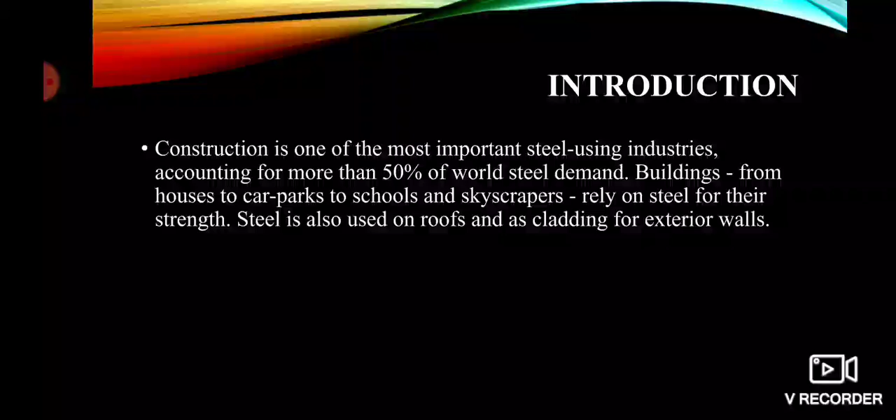So what is steel? Steel is an alloy of iron and carbon, and sometimes other elements such as chromium. Because of its high tensile strength and low cost, this material is best used in buildings, infrastructures, tools, ships, trains, cars, etc. Iron is the base metal of steel and can take on two crystalline forms.

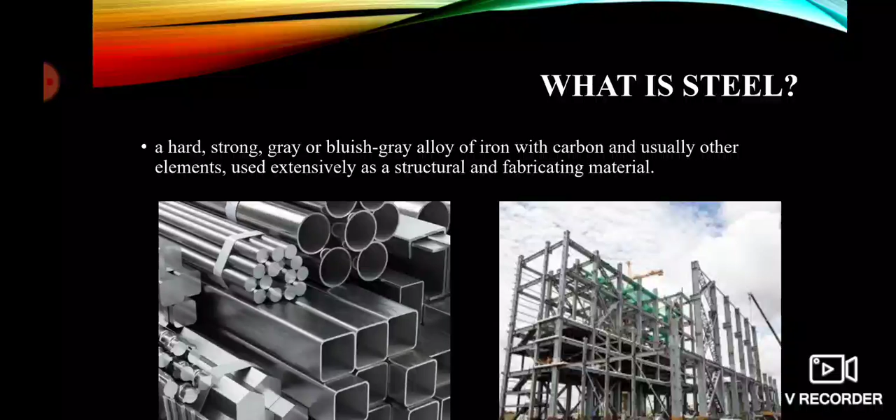Three common types of steel are used in construction. Firstly, plain carbon steel, or mild steel, which is one of the most used steels in construction. This is the most common type of steel used in building construction. It is incredibly strong and durable and ensures a sturdy build due to the strength carbon steel provides. It is hugely useful in building and has proven to be of great advantage.

Also, this type of steel does not crack when bent. It is immensely flexible and ductile, with great plasticity, along with the fact that it can endure calamities like earthquakes without causing cracks in the steel. This is the most advantageous factor of carbon steel.

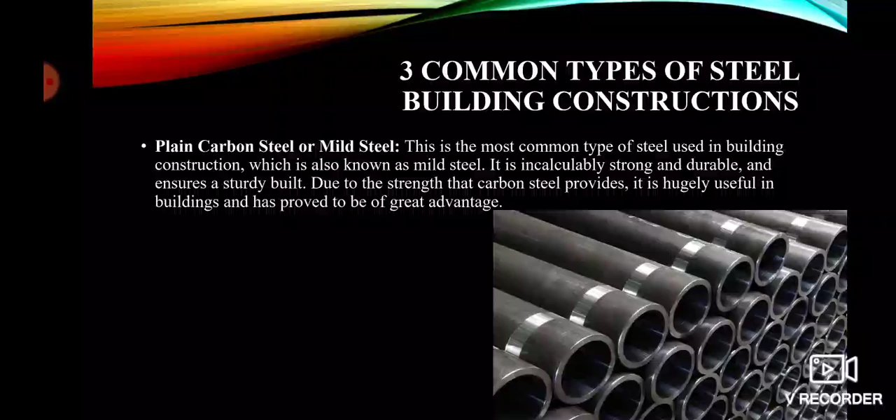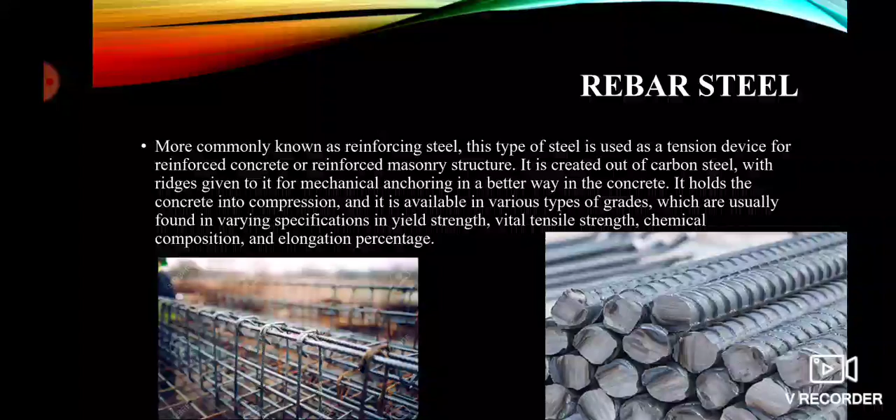Secondly, rebar steel, more commonly known as reinforcing steel. This type of steel is used as a tension device for reinforcing concrete or reinforcing masonry structures. It is created out of carbon steel with ridges given to it for better mechanical anchoring in the concrete. It also provides resistance, durability, and aesthetics, with local resistance and stiffness that spreads through a wide area, which other types of steel aren't usually equipped for. It has immense expansion potential and comes in various sizes depending on the country and construction.

Thirdly, structural steel. Structural steel shapes are made of this kind of steel, formed out of a precise cross-section, following definite standards for mechanical properties and chemical composition. Structural steels come in various shapes like I-beam, Z-shape, HSS shape, L-shape angle, structural channel, C-beam, cross-section, T-shape, rail profile, bar, rod, plate, open joist, or web steel, etc. Standard structural steel also varies in different countries with different specifications.

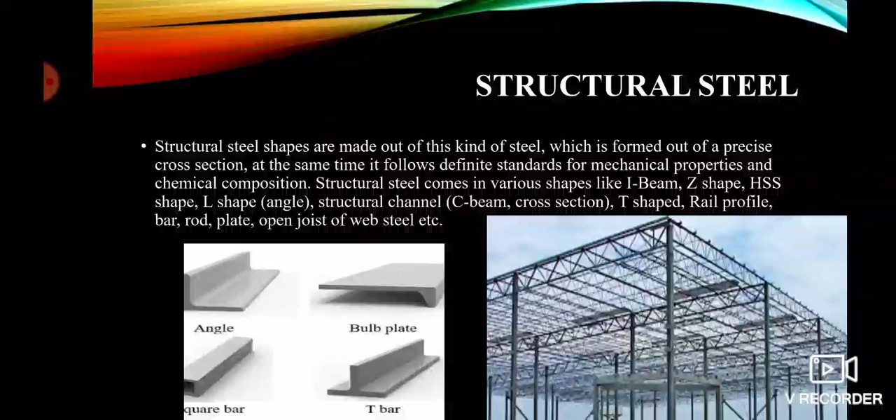For example, the European I-beam is a structural steel that comes in carbon, low alloy, corrosion-resistant, high-strength low alloy varieties. Structural steel is ductile, strong, durable, and can be morphed into almost any shape based on the construction. Here you can see a picture of what structural steel is, showing the different shapes this type of steel comes in: the angle, bulb plate, square bar, and T-bar. So why is steel used in structural buildings?

Now we'll be talking about 6 steel infrastructure benefits: speedy construction, service integration, value for money, flexibility and adaptability, sustainability, and quality and safety.

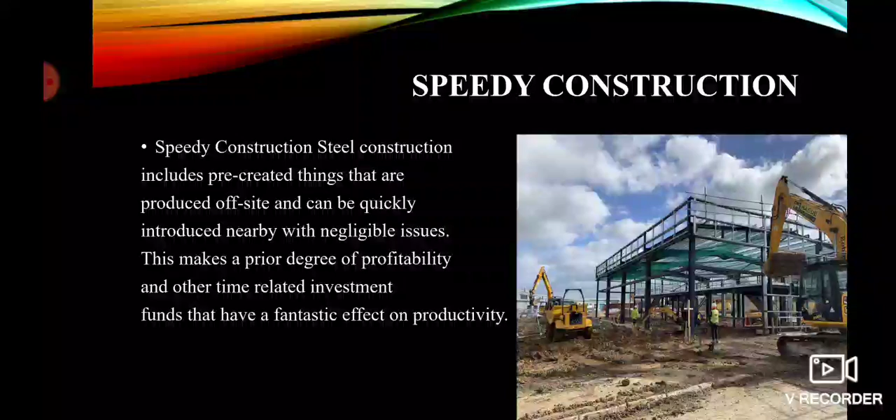Speedy construction. Steel construction includes pre-created components that are produced off-site and can be quickly installed with negligible issues. This makes a prior degree of profitability and other time-related investments that have a fantastic effect on productivity. One of the key benefits of using a steel structure is the ability to create more space. Steel construction involves prefabricated items that are manufactured off-site and can be installed with minimum problems.

Secondly, service integration. Service integration is one of the key advantages of utilizing a steel structure, with the capacity to create more space. Mechanical ventilation for building structures, such as commercial buildings, can be effectively incorporated without taking from the original design and depth of floors. This can be especially helpful when building height restrictions are concerned.

Flexibility and adaptability: steel pillars with web openings take into consideration open arrangement outline with insignificant columns and effective dissemination space.

One of the key benefits of using structural steel is the ability to create more space. Mechanical ventilation for commercial buildings, and structural steel beams with web openings allow for an open plan design with minimal columns and efficient circulation space.

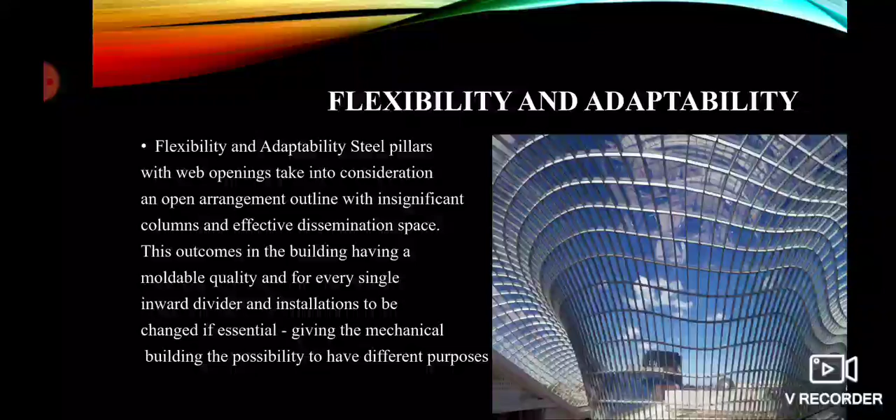Sustainability: all steel structures are 100% recyclable, and because of the building's versatility and adaptability, the structural life can be definitely protracted, in contrast with solid aggregations where their use can be restricted.

Also, all these structures adhere to high environmental standards and achieve low operational carbon targets.

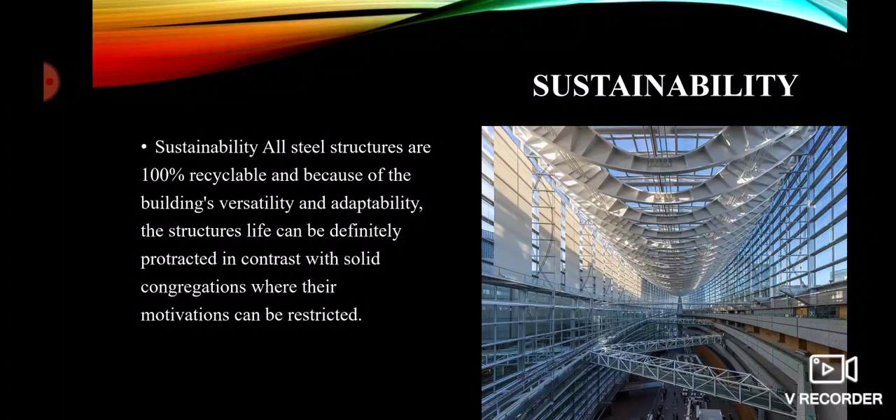Now we'll be talking about how steel is used in buildings and infrastructure. For buildings, structural sections provide a strong, stiff frame for the building and make up 25% of the steel used in buildings.

The possibilities for using steel in buildings and infrastructure are extensive. The most common applications are reinforcing bars, which add tensile strength and stiffness to concrete and make up 44% of steel used in buildings. Steel is used because it binds well to concrete, has a similar thermal expansion coefficient, and is strong and relatively cost-effective. Reinforced concrete is also used to provide deep foundations and basements and is currently the world's primary building material.

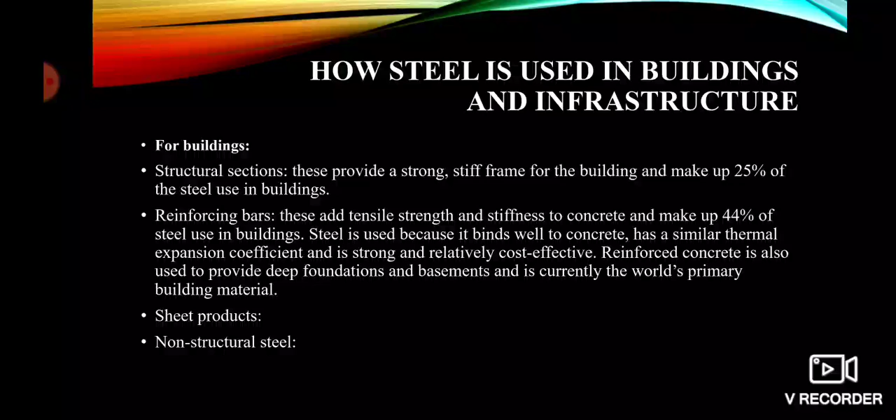Sheet products make up 31%, such as roofing, purlins, internal walls, ceilings, cladding, and insulation panels for exterior walls. Non-structural steel is also found in many non-structural applications in buildings, such as heating and cooling equipment and interior ducting.

For infrastructure, transport networks: steel is required for bridges, tunnels, rail tracks, and in constructing buildings such as fueling stations, train stations, ports, and airports. About 60% of steel used in this application is as rebar, and the rest is sections, plate, and rail track.

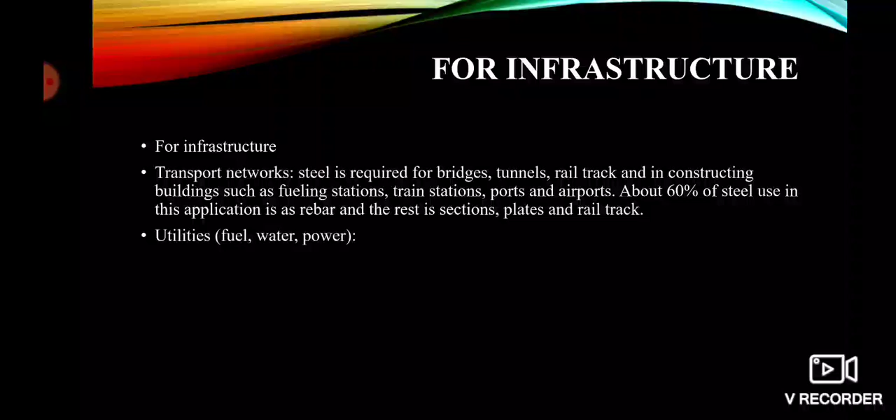Utilities: fuel, water, power. Over 50% of the steel used for this application is underground pipelines to distribute water to and from housing and to distribute gas. The rest is mainly rebar for power stations and pumping houses.

Other benefits of using steel in construction: we'll be talking about the other benefits of why steel is commonly used in construction. Firstly, it is reusable and endlessly recyclable.

Buildings are currently responsible for 39% of global energy-related carbon emissions: 28% from operational emissions from energy needed to heat, cool and power them, and the remaining 11% from materials and construction.

The same durability, the same properties, the same material. Steel can be recycled and reused endlessly. Two out of every three tons of steel produced is recycled material.

It contains at least 25% recycled steel. All steel products, including steel framing and steel roofing, contain recycled steel. Steel framing contains a minimum of at least 25% recycled steel and is continually and completely recyclable. Using recycled steel takes the pressure off non-renewable resources.

It enables energy efficiency in building and construction projects. This means steel sections provide an elegant, cost-effective method of spanning long distances. Extending steel spans can create large open plan, column-free internal space, with many clients now demanding column grid spacing over 15 meters.

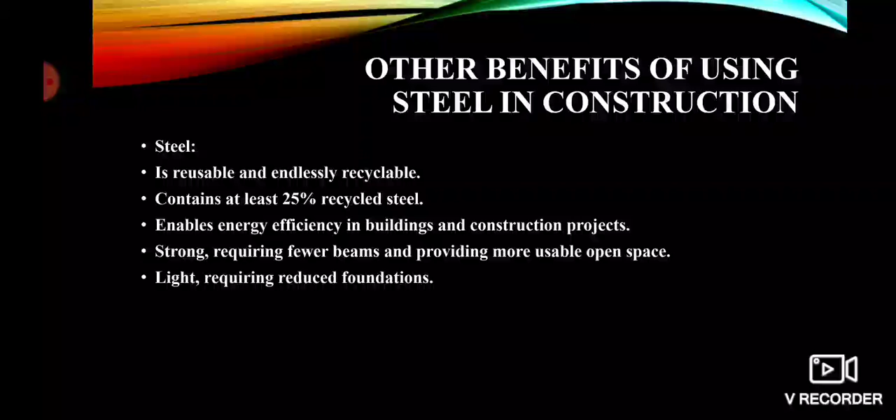So in conclusion, as you can see, steel buildings have many advantages that should be considered. They are easy to install and durable, demand minimal maintenance, and are environmentally friendly. They also offer much more flexibility compared to other types of construction.

For example, less material implies resource saving and less impact on the environment. And it is flexible in combination with other materials, and steel is earthquake-resistant due to steel's ductility.

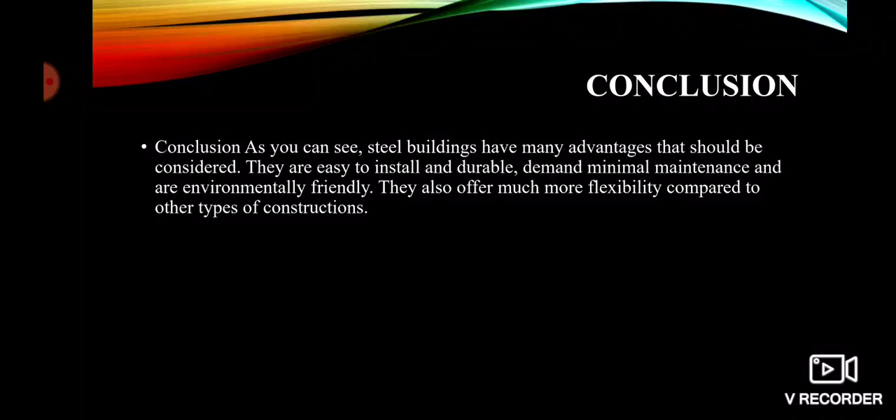Also, it is fast on site, built for prefabricated buildings, and is more durable than any other material in construction. So now I'll be showing a video about how a structure is being built with structural steel and showing how the different connections are being connected.